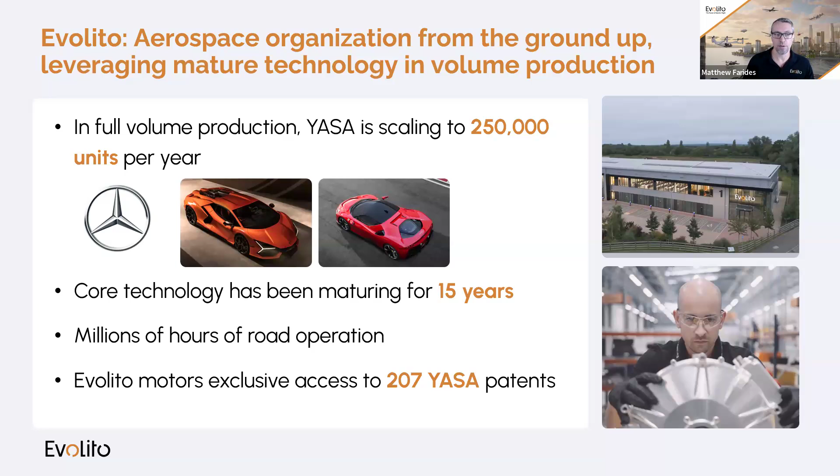Although we take that benefit from YASA, our mission is a bit different. Anyone who's worked both inside and outside of aerospace will understand that the business model of aerospace companies is fundamentally different. So Evolito was founded with clear intentions from day one to build certifiable high quality products at high rates. This enables the aerospace industry to make a step change in performance compared to today's machines. The investment in infrastructure, testing, production facilities, and certification capability was all planned from day one. It's part of our business model as we spun out from YASA, which is quite different from some of the other motor companies in this space.

A lot of that's also been implemented since. There's some great videos on our website. I may be able to drop some of those in the chat. I should have had it prepared ahead of time, but from our website you can find some videos of our manufacturing facility, with some great shots of just how far we've come.

In only 4 years, we've got what I would call a world-class facility. And this is coming from a guy who worked at UTC and Raytheon and other companies with world-class facilities.

Evolito was the first electric propulsion company to achieve DOA in the UK under the CAA, which is the equivalent of the FAA there. We're now solidly down the path of POA, production organization approval, and our assessment is currently ongoing. So we intend to be the first for that as well. We also achieved AS 9100 this year, which puts us in a great place to scale to full production of flight-worthy hardware in the very short term.

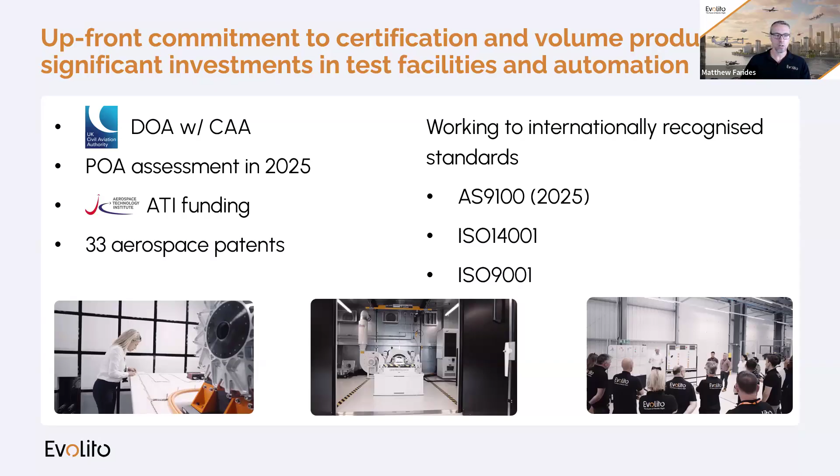So talking a little bit about the product line. Clearly we started as a motor company with a head start from YASA, but we've spent quite a bit of time in other spaces. I can talk a bit about the motor topology in detail, and the MCU topology in detail. Let's start with the motor.

On the reliability point, the stator design we've got, which I'll show a picture of in a minute, eliminates the possibility for adjacent phase shorts. We're also able to physically segregate multiple channels within the machine without interleaved windings. So fundamentally different from what you're used to. We can actually create a more redundant system within one machine than is possible with a radial flux machine.

We also use no iron cobalt materials, which are like 60 times more expensive than cheap iron pieces. Fundamentally, this motor leverages lower cost subcomponents than traditional motors do, and it's like an order of magnitude—not a small amount.

Liquid cooling of the stator allows for much higher sustained power levels compared to air cooling. And fundamentally, the dual rotor axial flux topology, which you'll see an image of in a minute, provides a second order effect: specific torque scales with radius, and that needs to sink in a little bit. As you increase the diameter of the machine, specific torque increases with an axial flux machine, whereas a radial flux machine is dimensionless—if you need more torque, it has to grow axially or radially. With us, the larger the radius, the higher the torque per pound.

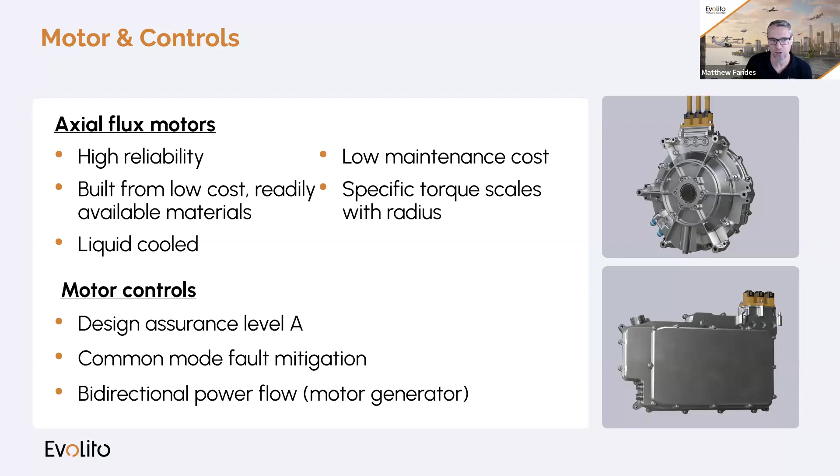Diving further into the machine itself, if you can see my cursor, you'll see rotor plates on either end. That's that dual rotor system that I mentioned. Magnets are just inboard of that. And then most of the magic happens in that stator section in the center, where you see those stator plates holding onto the stator housing and holding those pole pieces in place. So the center of the machine, the stator, is liquid cooled.

The motor segments themselves are extremely lightweight, very simple, highly manufacturable. A lot of the IP in this machine is around manufacturing technologies. It's not that complicated a machine. Otherwise, it's quite simple once you understand the details of it.

The stator topology provides physical separation between phases. This adds to reliability and long life, reduces the possibilities for cross-phase shorts. We're also able to reconfigure that stator quite easily compared to other topologies. So we can rewind those pole pieces for different motor configurations. We can separate it into single or dual channel configurations. That twin rotor topology provides a means to balance the forces of the assembly to minimize active material mass.

And we're managing the air gap on both sides with the bearing and hub assembly, which is not shown in this image. You can see some pretty good exploded views. If you look at YASA's website, they've got a moving, expanded view of it. And we've got some views of it as well on our website.

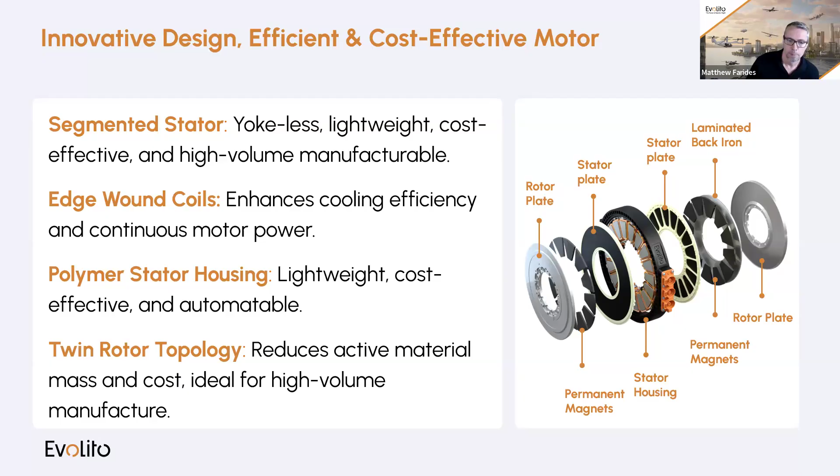But in general, the takeaway is the end turns in a traditional machine put your phases quite close to each other, and so this increases the probability of insulation breakdown. Whereas in our system, the phases are physically separated. So we've got a failure mode that's just not really possible in our machine compared to traditional machines.

There's also a cost driver there, because in a traditional machine, the quality standards for wire insulation and dielectric are higher due to that chance of having phase-to-phase shorts. So the physical isolation between phases, in our case, is highly improbable to a point where actually the insulation is somewhat redundant. It's really there—it's belt and suspenders, I'll say.

The machine would run without wire insulation due to the nature of how it's designed. And so even in the unlikely event of a short between adjacent wires within a coil, the motor will still operate just with a slightly lower voltage, and we'll detect that and can operate in degraded mode. So this is just one example of one of the many fundamental design features which enable this motor technology to achieve what we're considering a flight critical 10 to the minus ninth safety standard. Under NDA, we can talk about a bunch more, but this stuff has all been cleared.

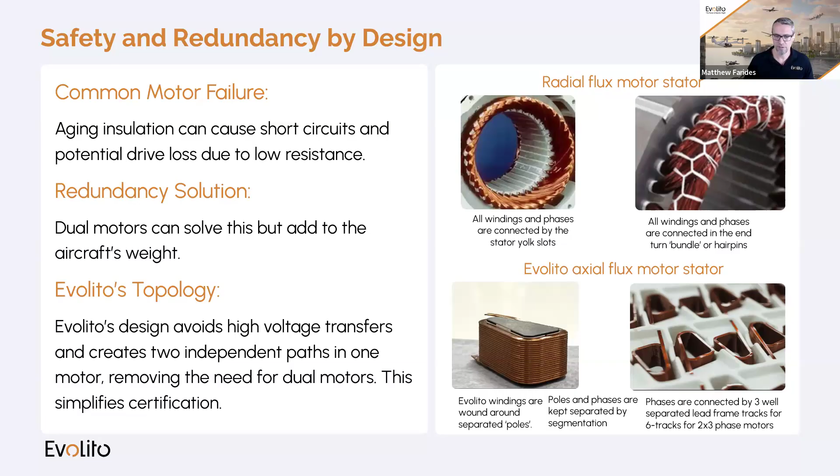There have been some improvements in both since. There aren't so many aerospace companies posting pictures of their motors for us to compare against, so check back in a year or two and hopefully we'll be able to compare them more directly. It's not to say axial flux is better at everything, but if you're talking torque density and volumetric efficiency, it's really hard to beat.

To be clear, this 50% is where we are today, and the technology is capable of quite a bit more. Both Evolito and YASA separately, and because we share IP, are working on improvements to this machine. The performance envelope will be improved over the coming years.

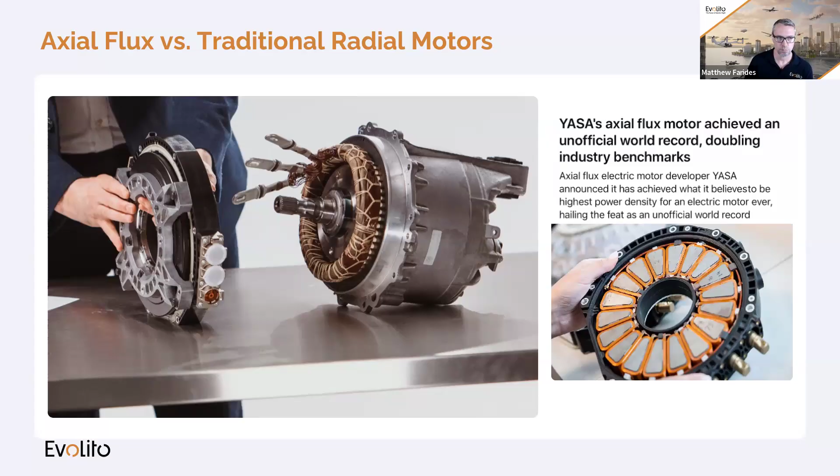Another comparison, this highlights that step change in power and torque density, and this opens up opportunities for lift-to-weight ratios which really weren't possible with previous technologies. There's a general rule of thumb here that we like to talk about: in the automotive industry, every pound of weight you take out of the e-motor, you tend to save another pound through the balance of the powertrain system. We believe this rule also applies in the aerospace market, and weight's an even greater premium here, I would argue.

So we're demonstrating the weight of our EPU solutions to be nearly half that compared to conventional radial flux motors, which is a significant impact for any aircraft, but it's an absolute game changer when you're thinking about something with 6 or 8 or more EPUs per aircraft.

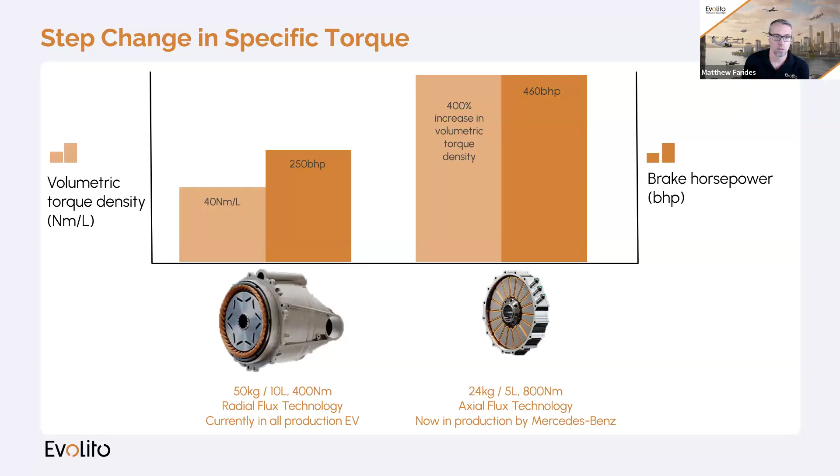So a higher efficiency propulsion motor gives - just to talk about that 5% and the equivalent 5% from the other end - you get a lever to pull when you reduce the propulsion system. That's either efficiency or perhaps a reduction in weight. So the aircraft gets more efficient or less weight, and either one improves the capability of that aircraft.

We've demonstrated 40 Newton meters per kg at the system level. That's a packaged EPU electric engine with the MCU, and power densities there that exceed 10 kilowatts per kilogram. Comparing that against industry conservatively provides maybe a 40% improvement on specific power. And if you take that number and use an example of a small eVTOL, 4-passenger, about 2 tons, it's pretty easy to see that 5% reduction in propulsion system weight.

And this weight reduction is further compounded at the system level. You reduce the weight of that motor, that reduces the aircraft weight. So then you need less battery storage, which again reduces weight. Iterating on the airframe, which requires less power to lift, then the motor, conductors, and distribution system can be optimized and reduced a bit further. And that goes on and on.

So we presented specifically on this topic in the past, and we have some in-house system level optimization tools that can justify this assertion, and we have real world data to back it up. You can expect another 5% out of that airframe by optimizing, or by the step change that we enable. So a 10% aircraft weight save is a game changer, whether that's used to increase the range or load capacity. In some cases that may be enough to make or break a business case.

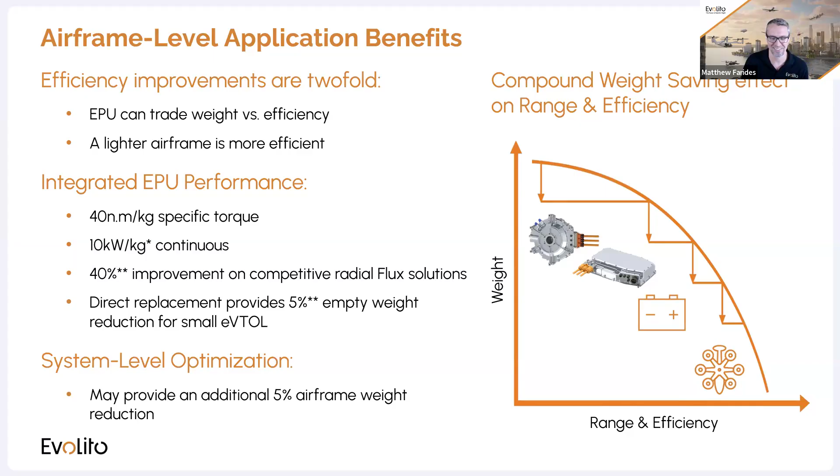But the best motors also make the best generators. So there's a couple of applications where you can take a high power dense piston engine, or a turbine system. Specifically, if you think about a turbine that's already designed for helicopters, they're already quite weight reduced, and the speed range of the output shaft fits well with our motors around that 6,000 RPM range. So there are good applications where we can use either a parallel hybrid or series hybrid with our motors as a generator to optimize some airframes that wouldn't be viable otherwise.

A quick overview of our product line. Some of these images are old, so bear with me. We are working on newer images, but the size and performance is what we have in the pipeline today.

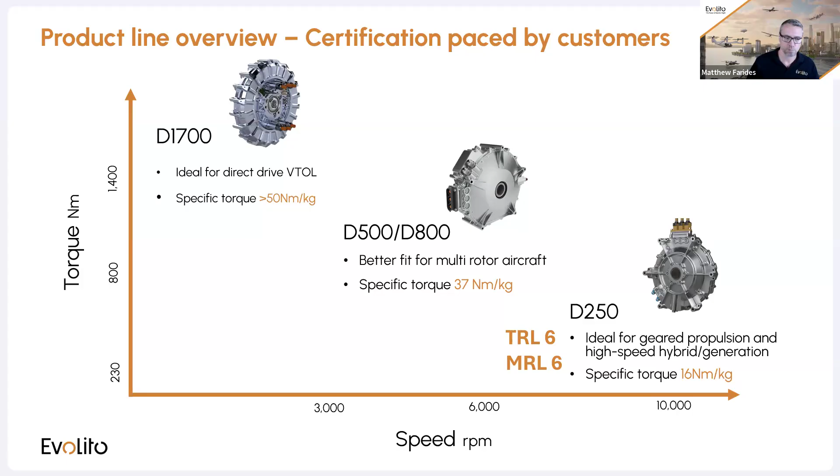This is part of the reason that Evolito is targeting DAL-A. Although we want to be viable in that low end of the market, especially for VTOL customers, it requires safety much more like a CS25. So we need to be DAL-A to satisfy those customers.

A CS23 is generally covered by the EASA basic category, where a safe emergency landing can be adequate in the face of a critical system failure. VTOL being operated commercially in urban air mobility, for example, or as an air taxi, are likely to fall into that enhanced capability where continued operation is mandatory, and you need enough range to complete the flight or return to origin. That's what's driving the failure rates and criticality levels to align more closely with the CS25 aircraft class. We anticipate relatively strict requirements at launch.

The certifying agencies are going to have a microscope on everything. We're hoping that once these propulsion system solutions and aircraft types have been sufficiently proven with enough flight hours and high reliability data, perhaps there'll be some opportunities for reduction in complexities and further aircraft optimization.

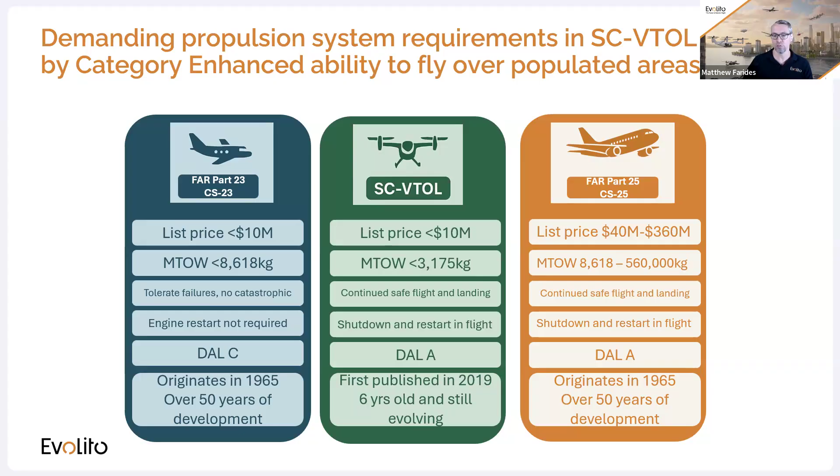In one of the talks I did earlier this year, I referenced the PT6. That's a great example of an engine system that's been so reliable that they've had some of the regulators ease up on what the airframe needs to do to justify safe flight, because the reliability of that system has been proven to such a high level.

Further to the point on criticality of motor controllers for eVTOL, the lines become a bit blurry between a FADEC, a flight control, and a motor control, because the motor controls can directly affect stability of the aircraft and the flight control system of some of these aircraft types. Failure rates are being driven to a higher standard for multi-rotor eVTOL applications.

So the takeaway here again is we're required to act as a flight control in some cases, and we're required to act as a FADEC in others. That's different for each aircraft type. Because we're working on so many different aircraft types, we really need to be at the highest level for everyone. So DAL-A was the plan since day one.